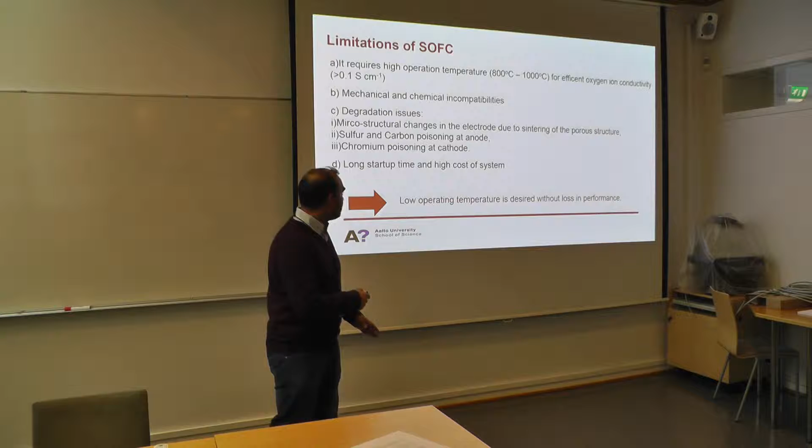The main idea of showing this slide is to show that this high temperature is an issue, and we would like to decrease its operating temperature. But at the same time, we don't want to lose any performance, because these devices give, let's say, 1 watt per square centimeter at 800 degrees, but we would like to get the same performance at lower temperatures. When I say low temperatures, I mean something between 400 to 600 - already a progress from 800. Ideally, if it would work at room temperature, that would be great, but the problem is we don't get enough ion conductivity, so we need to raise some temperature. Still, 400 to 600 is already quite good.

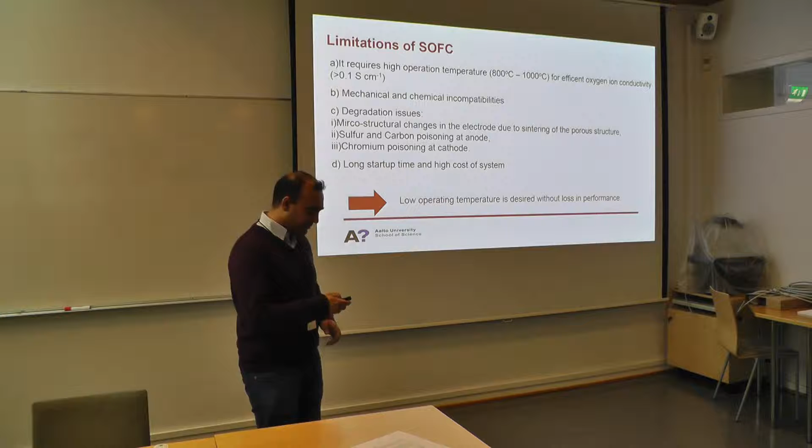So, one question. I talked about the solid oxide fuel cell, and I also briefly talked about other fuel cell technologies. I said one thing during my talk, about the main advantage of using solid oxide fuel cells over PEM fuel cells, which are the low temperature fuel cells. I write here 3 options: solid oxide fuel cells are low cost, they are excellent for mobile application, or fuel flexibility, meaning we can apply different fuels. What do you think? Which of these options? I think everybody knows, but they are shy to answer.

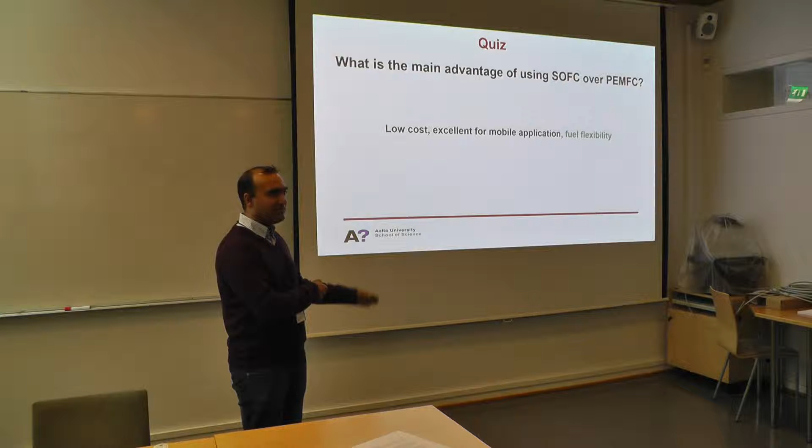Yes? Or should you tell? Yeah, I think it's the last one. The last one, yeah, I think everybody knows about it. I think that was pretty straightforward. Yeah, exactly, so that was the main idea - fuel flexibility. I didn't talk about anything about mobile application. I should have talked about the applications also, but I was thinking that maybe that's not very interesting for this one.

Okay, and then I'd like to also briefly cover - we talked about those electrode properties and ionic conduction - but I'd like to ask you, when we are choosing materials for our electrode, what kind of properties would we like to have in them? So what kind of properties do you want? They have to conduct, or - any guesses what kind of properties we want in electrodes? So I put 5, let's see.

So basically our electrodes should conduct electrons - they should have good electrical conductivity. Okay, that's one. Anything else coming to your mind? Pores - yeah, they should be porous, so that the gases can diffuse through it, and they should allow electrons to connect. Mechanical stability? Yeah, exactly, that's very important, because we have to use them at high temperature. High surface area - exactly, but we need a good porous structure so that we get high surface area. Yeah, that's correct. Anything else you'd like to say?

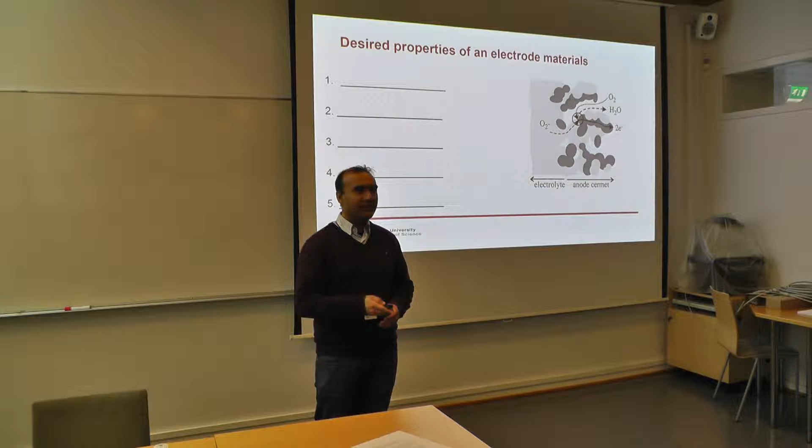Okay, that's actually very good, excellent. So here I put my own list: they should have good electrical conductivity so that they can conduct electrons. They should have good catalytic properties - they should be good catalysts. And the thermal expansion coefficient should match with the other materials, because if the thermal expansion coefficient is not matching and we operate the device at high temperature, there is thermal mismatch and it can lead to cracking or this kind of issue. So this is also one issue we need to take into account. Chemical stability - they should not chemically react with our electrolyte and create problems.

But how about this ionic conductivity? How about if our electrode materials also have some ionic conductivity? Is it a good thing or is it a bad thing? What do you think? You are saying something?

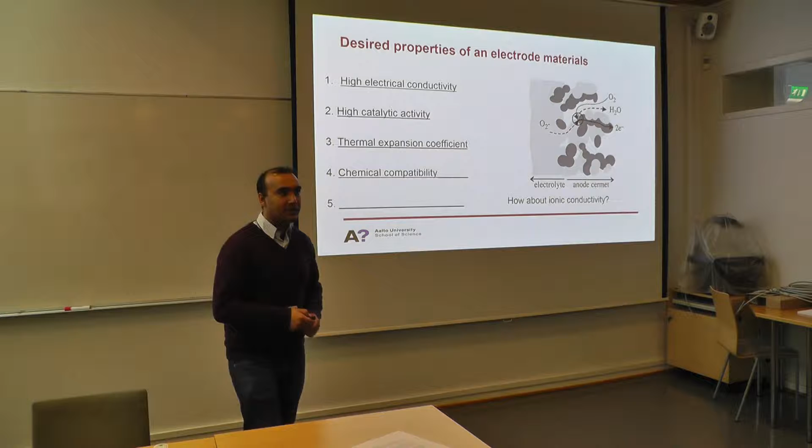Yeah, it's a good thing, isn't it, to increase the three-phase boundary? Exactly. So if our electrode materials also have this ionic conductivity, meaning they have good electronic conductivity, and also good ionic conductivity at the same time, then it's a good thing, because the reaction can happen at a larger surface, and we have increased triple phase boundary.

Greetings from VTT, I'm working with fuel cells. I'm here out of interest, and maybe I'll see you in two weeks when I can come here to talk.

Just a question about the electrodes. Some students or visitors ask about this, since these are quite exotic materials, sometimes lanthanum, strontium, manganite, cobaltite. Can you comment on the availability? The amounts used are really small, but in the long term and mass production, could you say they are rare?

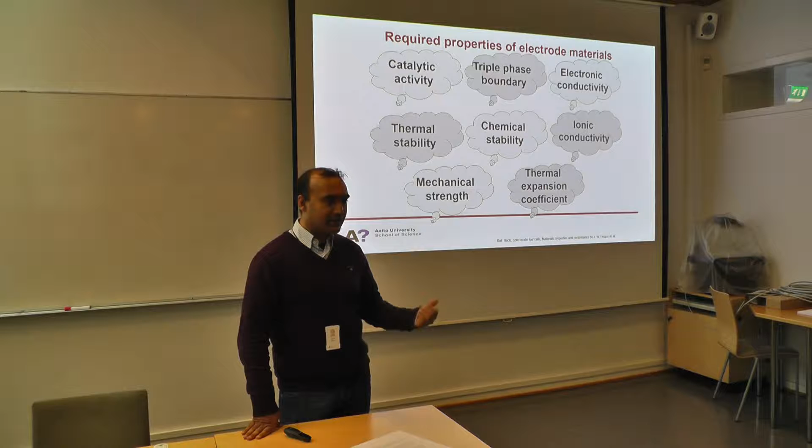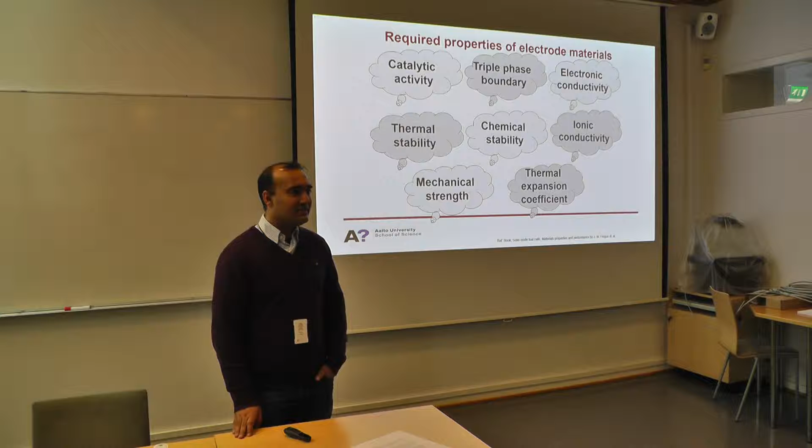Unfortunately, we just buy these materials, but I know these elements are not plentiful in nature, so that is an issue. The positive side is that the amount needed has been reduced, even dramatically, compared to what it used to be 20 or 10 years ago. It's pretty small now, and they are really good in catalytic activity.

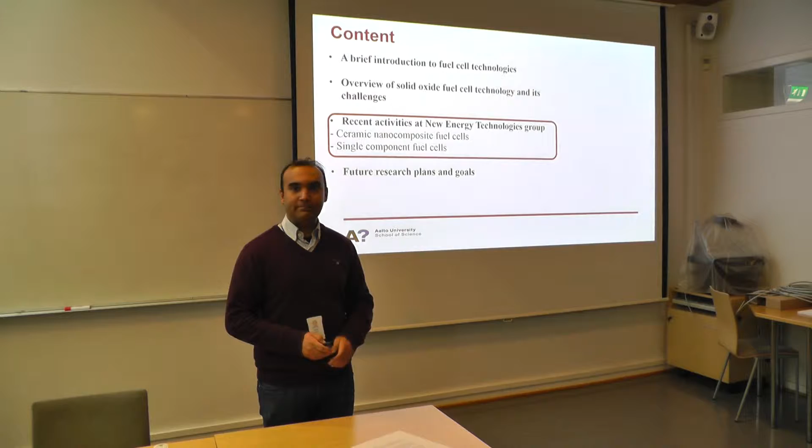So this is the first part of our talk. Now I'll go into what kind of research we do in our research group, because these are the next generation of solid oxide fuel cells. As we know from the lecture, solid oxide fuel cells are a promising technology. However, ionic conductivity is a big issue, and we have to operate at high temperature. Our research efforts mainly focus on decreasing the operating temperature of this device, without compromising on the performance of the cell.

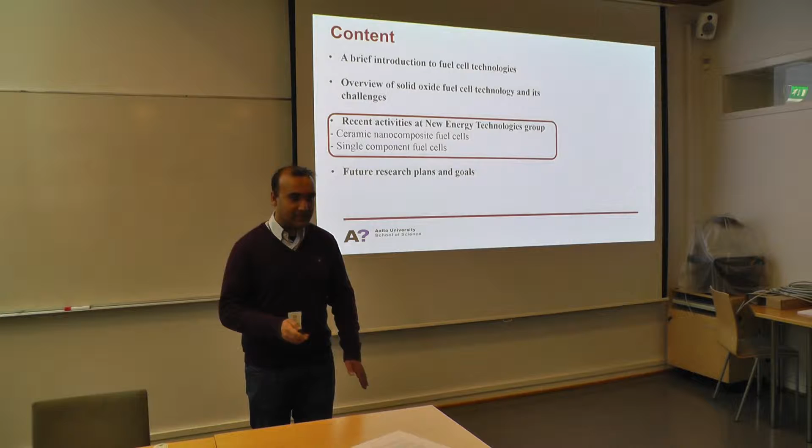So let's start with ceramic nanocomposite fuel cells. Ceramic means metal oxides, like solid oxide fuel cells, which are also called ceramic fuel cells. Here I add the word nanocomposite, because even in solid oxide fuel cells we have nanocomposite materials in a way, the electrodes are nanomaterials. But here I mean something different, and I will explain.

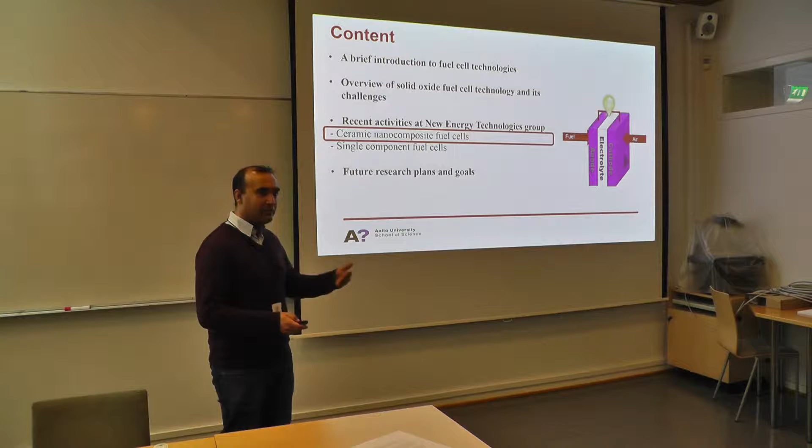As we know, the performance of the zirconia electrolyte is limited because its ionic conductivity is low below 600, even below 800 degrees. At 800 it's 0.1 Siemens per centimeter, but below 600 it's very, very low, so it's not possible to use. In our notes we have the equation for resistance.

If we want to decrease the resistance of the electrolyte layer, since low ionic conductivity causes high ohmic losses, we have two possibilities. One is to decrease the electrolyte layer thickness. A thick layer gives more losses, so we can make it thinner, but there's a limit, because if it's too thin, gases can cross over, which we don't want. So it has to have a certain thickness, but still be very dense so it doesn't allow gas to pass through.

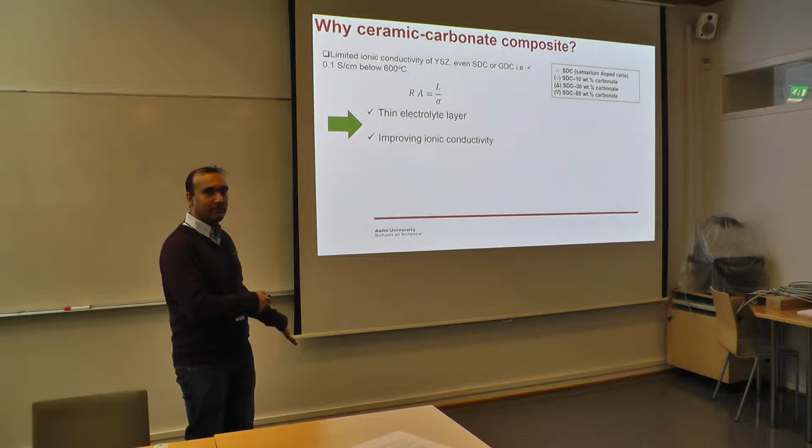The second way to decrease resistive losses is to improve the ionic conductivity, and in our group we mainly focus on this. So what we do is use a composite material, mixing the solid oxide fuel cell electrolyte material with some alkali carbonates.

We generally use lithium, sodium, and potassium carbonates, which have different melting temperatures. At the eutectic point, mixed in a certain mole percent ratio, the melting temperature can be 397, whereas alone, lithium carbonate has 723, and sodium and potassium have their own melting temperatures. But when mixed, their melting temperature goes down. Looking at the phase diagram, which isn't the main topic of this lecture, by making different composites we can decrease the melting temperature of the mixture.

Eutectic temperature is the point where it has a minimum melting point. So when we mix them in this mixture, this is the lowest melting point.

So the main idea is that if we mix our yttria stabilized zirconia or any ionic conductor, gadolinium doped ceria, or some other ionic conductors, if we dope or mix them with alkali carbonates, with this composition, at 400 degrees and over, it melts. And what we see is that it improves the ionic conductivity.

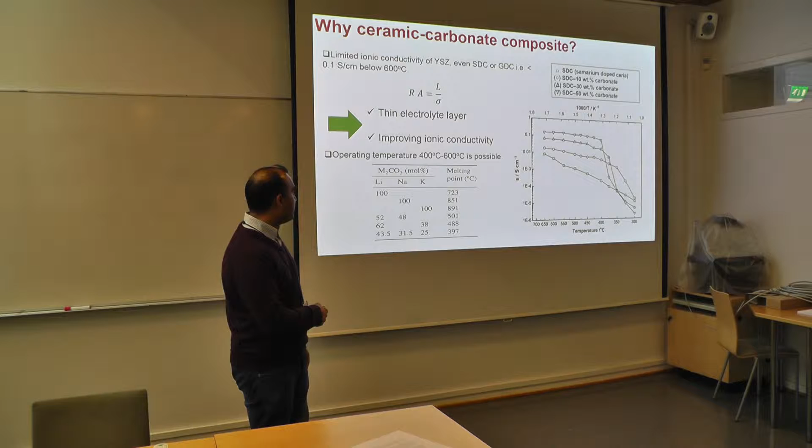So basically what we noticed is when we mix conventional solid oxide fuel cell electrolyte materials with alkali carbonates, we see some improvement in the ionic conductivity. How it happens, that's another thing, but that's what we noticed. And that gives us hope that using those mixtures, we can reduce the operating temperature of these devices from 400 to 600, so that's what we are trying to see.

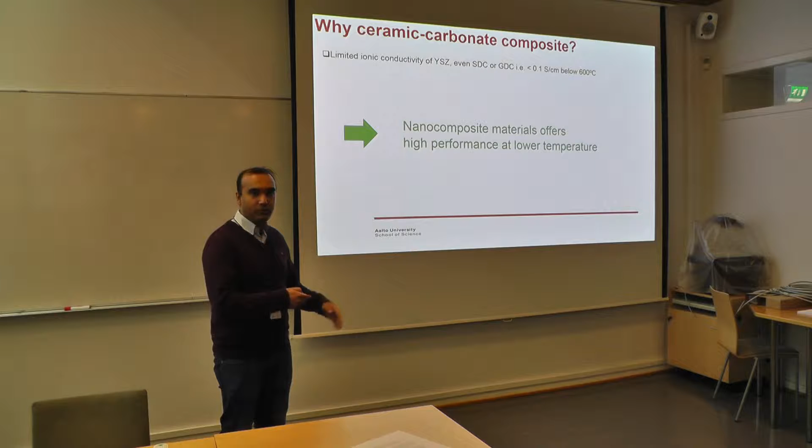So these nanocomposite materials, I'm calling them nanocomposite materials, meaning they are composites of samarium doped ceria, like cerium oxide, which are ceramic materials, with the alkali carbonates. So these nanocomposite materials can give high performance at low temperature, and that's what we are mainly focusing on in our research group.

It generates hydrogen ion, and it exhibits basically multi-ionic conduction. We generate alkaline ions, we get oxygen ions and carbonate ions, so we get different kinds of reactions happening, and we don't understand exactly how these reactions are happening. So we assume that it's acting as a solid oxide fuel cell with oxygen ion conduction, but we also see that when we operate it over the eutectic temperature, the performance increases.

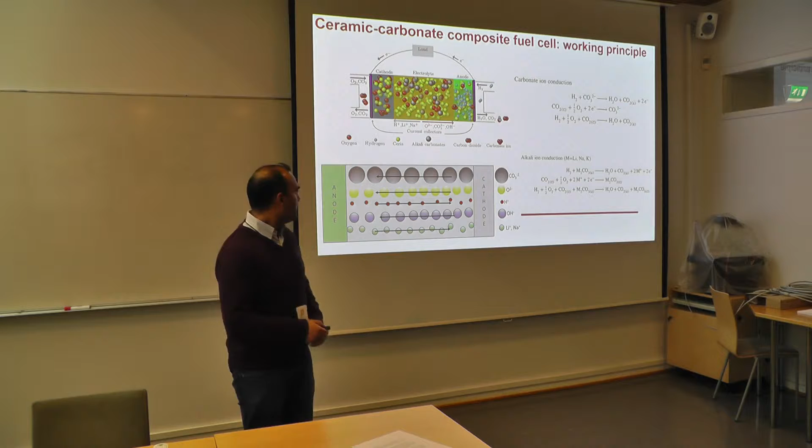So in this scheme we are assuming that ionic conduction is taking place through alkali ions, and in the other case we are assuming it's happening through carbonate ions. Both are possible, but we do not know exactly which reaction scheme is dominating unless we apply some analysis and characterization technique to dig into it more. But the best thing is we get higher performance at lower temperature, and we will see that soon.

One more thing here. Since it's a composite material, the blue color you see is basically the carbonates. As I said, over the eutectic temperature, which is over 400 degrees, this carbonate is in molten, liquid form, so here I show it with the blue color. And these white dots you see are our metal oxides, like ceramic material, gadolinium cerium oxide, or any ionic conductor which is metal oxide.

So now the ions move through different channels. For example, the oxygen ions move through the vacancies in the bulk of these oxides, like in the case of solid oxide fuel cells. But now we also have carbonate ions which can flow in the electrolyte, in the carbonate. They can go through this layer, or transport through the interface, or a combination of those. So there are different channels.

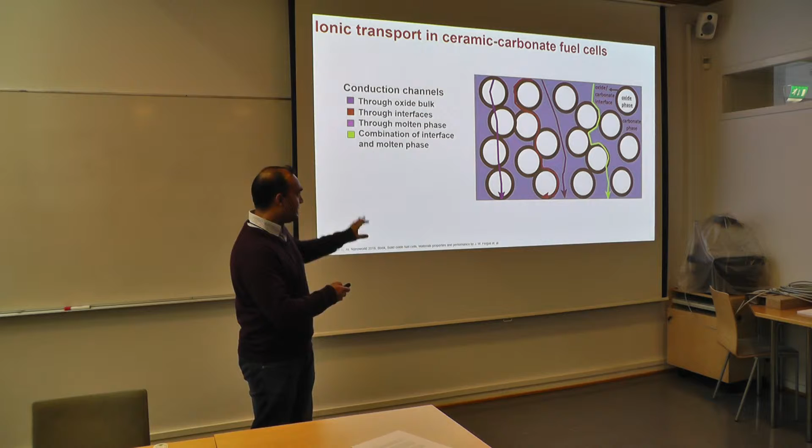From the literature and from our experiments, it seems to us that these interfaces are very crucial for the ionic conduction here. So it means we need to have an optimized composition to get higher performance. But this is just the overview of this. If you don't follow that, that's perfectly fine.

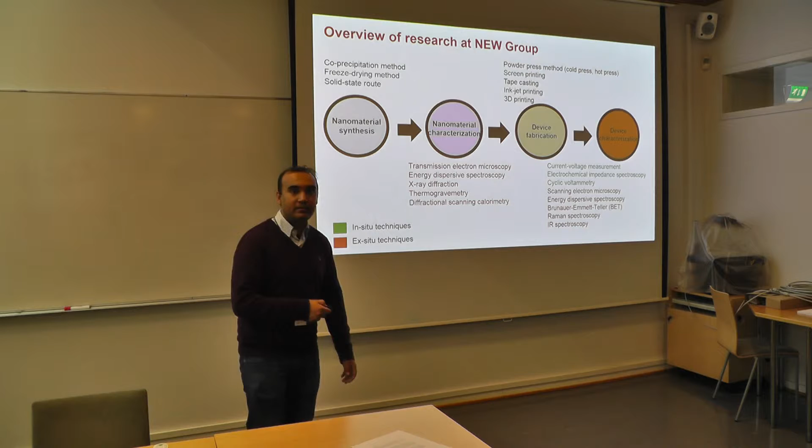Now here is what we do in our research group. We synthesize these nanomaterials, starting from raw materials, using different synthesis methods. Then we characterize those nanomaterials to see whether we have gotten our desired properties, using different characterization techniques we will go through later. From those nanomaterials we do device fabrication by different fabrication methods, and then we characterize again. I think in your lab sessions you will see how to make fuel cells, and you will do this characterization in the same lab, so you will get a better idea of how they actually look like.

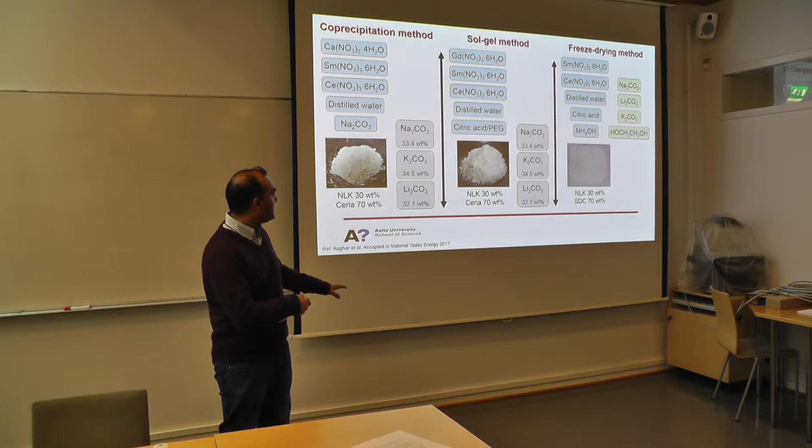Here we start with the first step, which is to synthesize different nanocomposite materials, and there are different synthesis routes to prepare these nanomaterials. Without going into detail, I just want to show their names: there is the co-precipitation method with some reaction scheme—we won't go into detail in this lecture—there's a sol-gel method to prepare these nanopowders, and then we have the freeze drying method to prepare these powder materials.

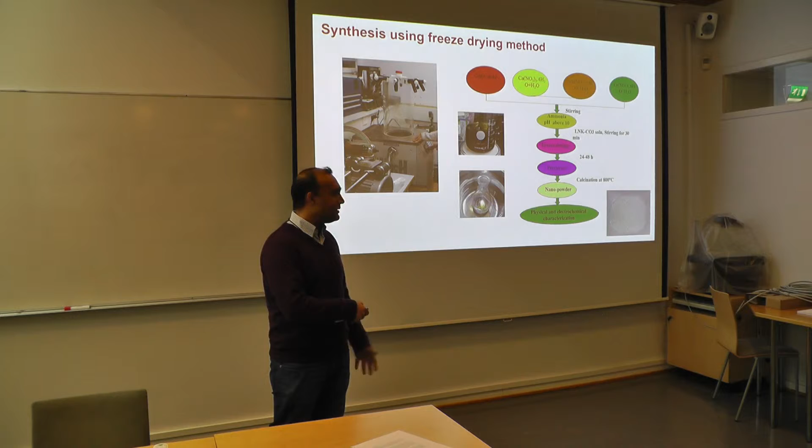Freeze dryers actually look like this; it's a machine that you will also see in the lab. Here is the reaction scheme, which we can skip. The main idea is that by using those precursors and their compositions, we can get these nanopowders in the desired composition, with the desired properties, particle size, and all those things.

Okay, that part I skipped. Just wanted to show you.

So once we get these powders, the next step is we synthesize all different kinds of nanopowders. The first thing is we want to get the right composition. For example, if we have alkali carbonates, eutectic mixture of alkali carbonates, then we have our ionic electrolyte material, metal oxides, ceramic metal oxides. In electrodes, we also use composite materials.

Then we dry them because we use some kind of solvents in the ball milling machine. So we get this powder which is dry now, and then we grind it, and after those compositions are ready, we start making our cells, which we also call pellets, which look like buttons.

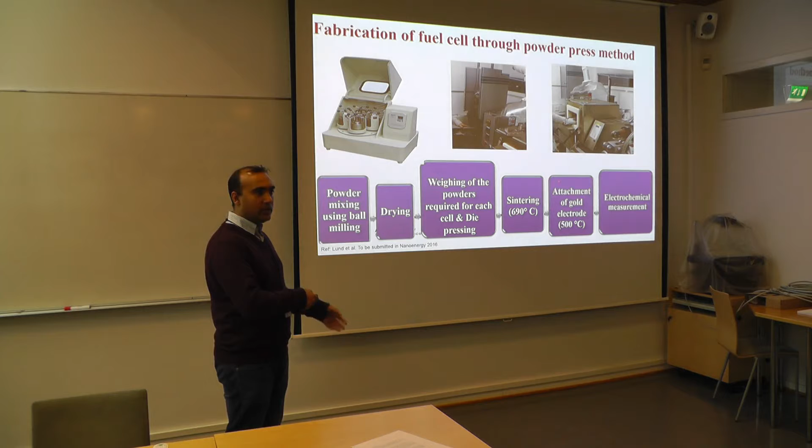But those are quite fragile, and then we need to sinter them so that all the impurities, or if there is any binder that we use to bind the particles together and improve the interface between the particles, are removed. We do sintering, and after that we get some buttons.

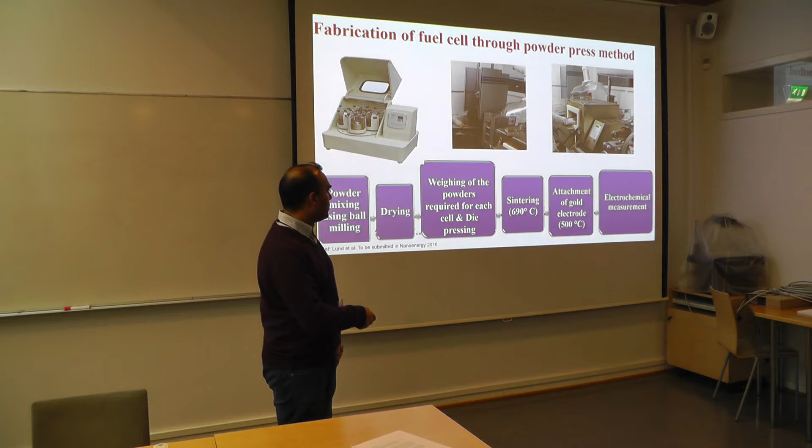I should have one figure of a pellet here, then it's more clear. So we have these powders which look like a button now, and then we apply some gold electrodes, and then the cells are ready for electrochemical characterization.

So we apply these current collectors on both sides, and there is a gas tube here. Gas is coming here, and this cell is placed on top of this tube. So the lower surface of this cell is exposed to the gas in this tube, and then we have another gas coming to the external part of it. So the outer surface is exposed to one gas, and the inner surface is exposed to the other.

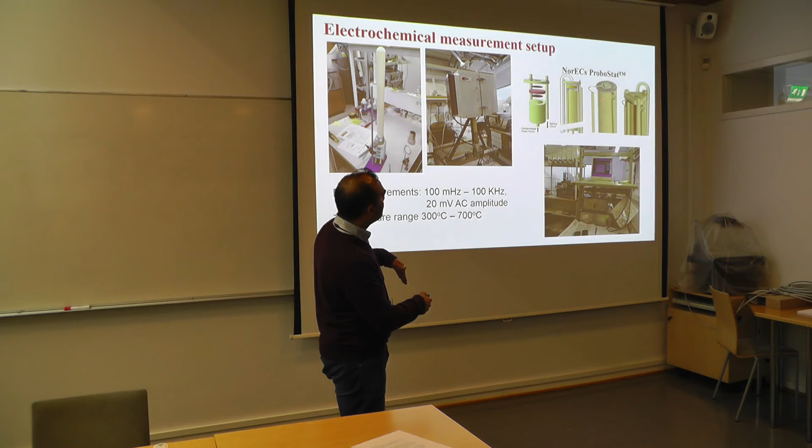And then we apply these current collectors, inner side and outer side, and that's it. And then we apply the gas here, just close the outer chamber, as they call it, and then it's ready to be measured.

And then we have a furnace, and all the electronic parts are here. So we have the gold electrodes, and here we have all the electronics, which is outside the furnace, and the upper part where we have our cell is exposed to high temperature. So that's how we do it. And then we apply different kinds of current voltage measurements and impedance measurements. We will go through it in more detail.

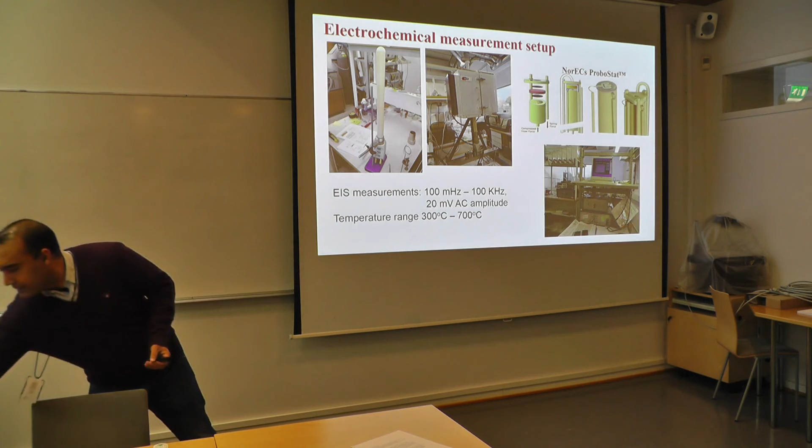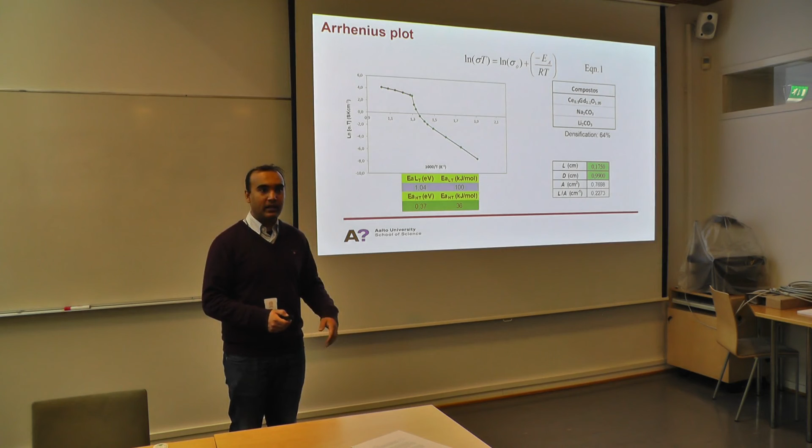Great, okay, so that was about this. Okay, and then the first thing, if we are making electrolytes, we measure its ionic conductivity with the same Arrhenius plot that we have seen, and you also have one homework on that.

And here is one Arrhenius plot of a composite material. As I said, there is a straight line here, but around, I think, 400 or 500 - this is the binary carbonate, so it's 500 - the ionic conductivity jumps rapidly. So something happens at this point, and then at some point it starts increasing linearly again in the logarithmic scale.